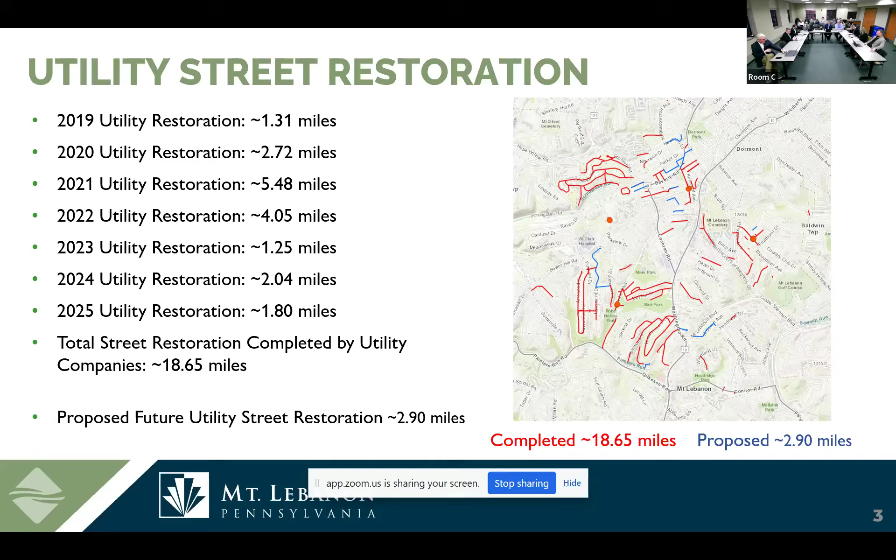Before we get into detail, some overall statistics: the base bid we're recommending for reconstruction has a PCI rating of 53.6, and the alternates are 36.2. That may seem odd, and the same goes for maintenance at 70.4 and 54.5.

One thing to highlight is that when we analyze roads for consideration each year, we don't look at all 88 miles of road, we look at the nearest 3 years and evaluate those roads to see which ones should be considered. We also take into account the Public Works patching list, and the other thing worth mentioning is that the last inspection completed on the roads was back in 2021, so it's 5 years old.

So over time we do notice a deviation from the PCI to actual conditions. It does vary a bit, so I can assure you that once we get the Vialytics data in—we were delayed this year with all the snow and trying to maintain the schedule needed to get the road program out to bid—the street maintenance numbers really aren't 70. They would be lower if we did a new inspection on those streets. That's just the data we have right now.

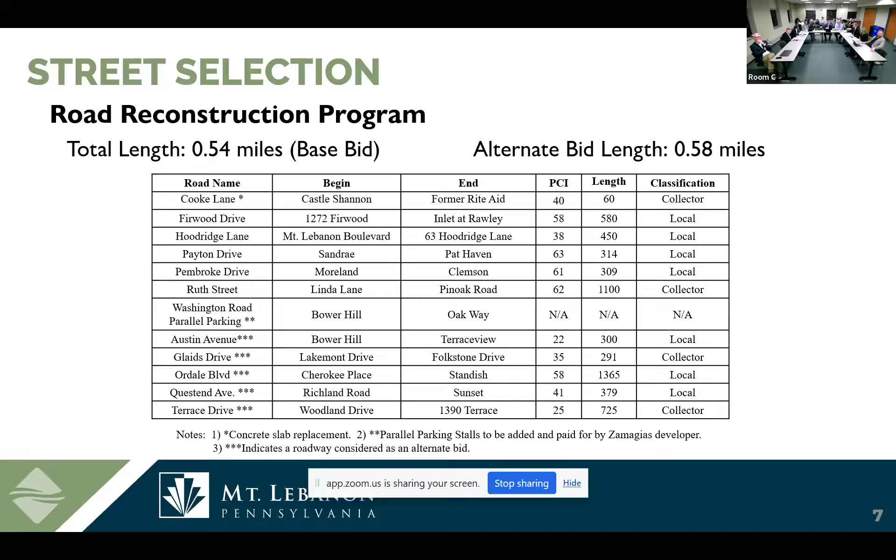That being said, jumping into Cooke Lane. Cooke Lane, we're not planning on a full reconstruction of Cooke Lane. You may or may not know that the municipal line runs right down the middle of Cooke Lane, so half is owned by Mount Lebanon and half is owned by Castle Shannon. The utility company - Columbia Gas - replaced half of it, the Castle Shannon side, unfortunately.

So the whole Castle Shannon side is new going down, but there are a couple, as you come off of Castle Shannon Boulevard, there's a couple slabs that are in real poor condition. Right there is one of them. This is just from a street view, so this is not proposed as a full reconstruction of the road. We're going to replace 2 or 3 slabs on this street. It's best in the reconstruction contract because we have all of those excavation items, concrete items, and things like that. So although it's in the reconstruction contract, we're not proposing a full reconstruction of Cooke Lane. It is going to be multiple slabs.

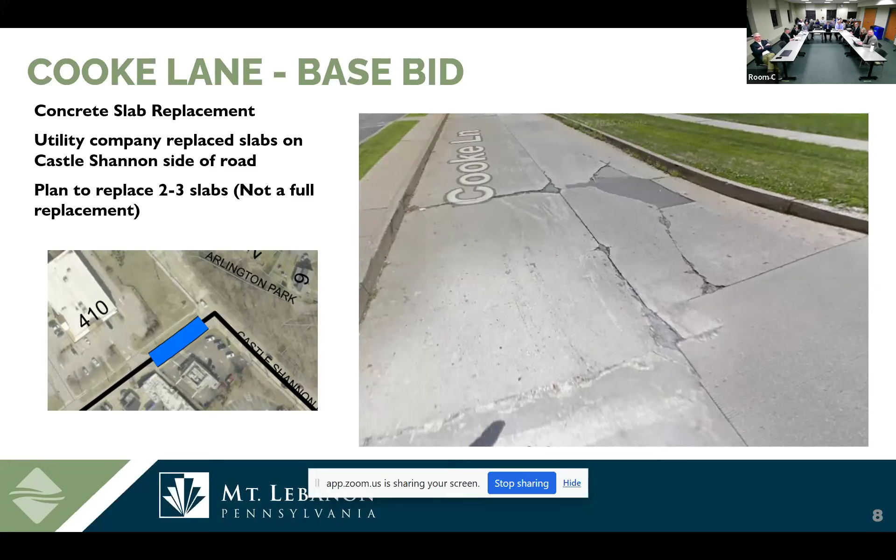And this is one that we're working kind of in unison with what the utility company had completed. We've been patching that for a couple of years just to keep it safe, so there's some settlement, some drainage issues underneath of that concrete, and we're kind of locked into concrete now because the other half was done in concrete by the utilities, which is fine. Concrete is fine as well.

I thought they did asphalt. No, the lower end bottom section is asphalt, from the tracks down to Mount Lebanon Boulevard is asphalt, they overlaid all that. But from like the entrance to the Rite Aid up is all concrete.

So Firwood Drive is the next road. This is one that we've been, as you can see, portions of Firwood have been done in 2017, 2020, and 2024. This is picking up on the next section, heading down toward Rawley.

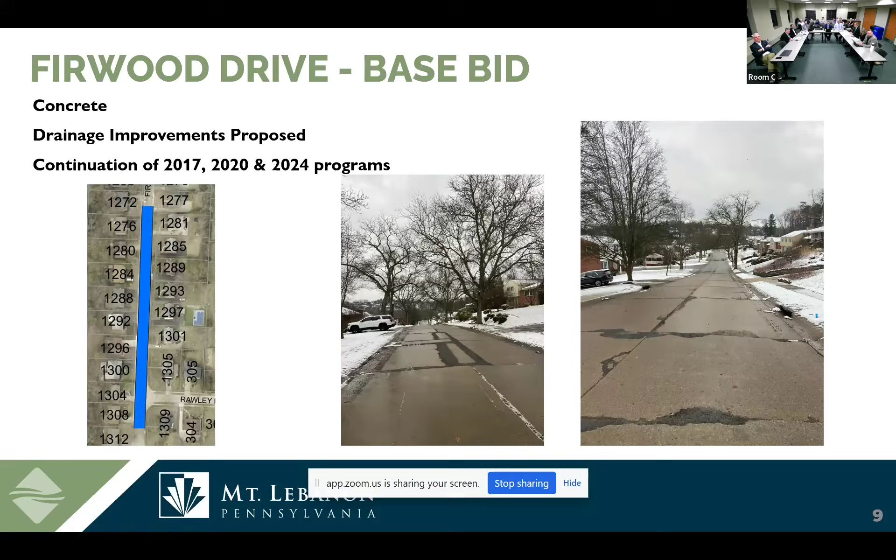Hoodridge Lane is an alley that comes off of Mount Lebanon Boulevard, right as you come off of Washington Road and make the turn onto Mount Lebanon Boulevard. It's on the right-hand side, right before Roycroft. This is actually owned in fee by the municipality, in conjunction with the municipality, the school district, and Allegheny County. So we actually own that parcel you see outlined in blue, shaded in blue. That's actually a parcel.

Is Mount Lebanon Boulevard a county road? No, it's a state road. So we can't do anything to it, correct. Wait, so you're saying Hoodridge Lane, that blue area you might think of as a road, is actually a parcel owned by the municipality, right? Interesting, okay. And there's about 5 houses that back that lane that use it.

And as you can see, it's in pretty poor condition. We are proposing, instead of concrete curbs on this road, bituminous wedge curbs there, just to save a little bit of cost. It's just the asphalt curb.

How will you know you're in Mount Lebanon? All right, well, let me ask though, put that aside. What is our standard, and what do our standard policies say we have to do on public rights of way? This is a parcel. The standard curb is an 18-inch full-depth concrete.

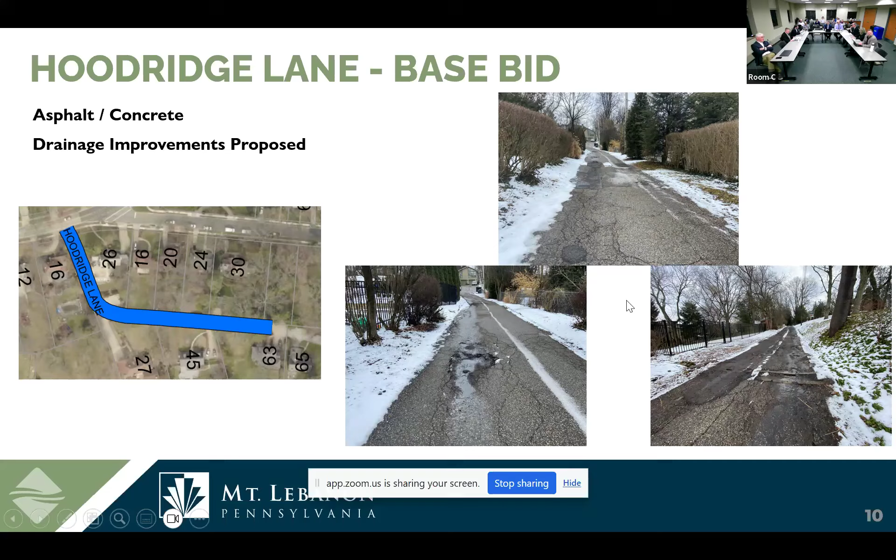Thank you for humoring my questions.

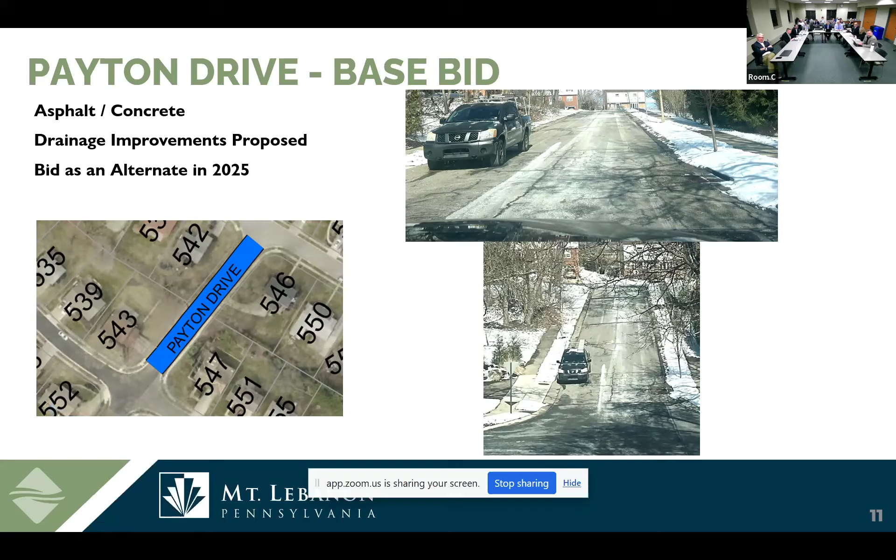Payton Drive, this is a road that we had bid last year as an alternate bid, so we're looking to bring it back onto the program and use it as a base bid this year. Same with Pembroke Drive, which was an alternate last year that we're looking to add as a base bid this year.

Ruth Street was on the program also as an alternate last year. We're looking to do some drainage improvements. Obviously, this is right next to the school, so this would have to be done when school is out of session, similar to when we did Pin Oak last year. We did Pin Oak right around the school last year, and Old Hickory the year before. So this neighborhood is one we've been taking streets year after year. This one's needed a long time.

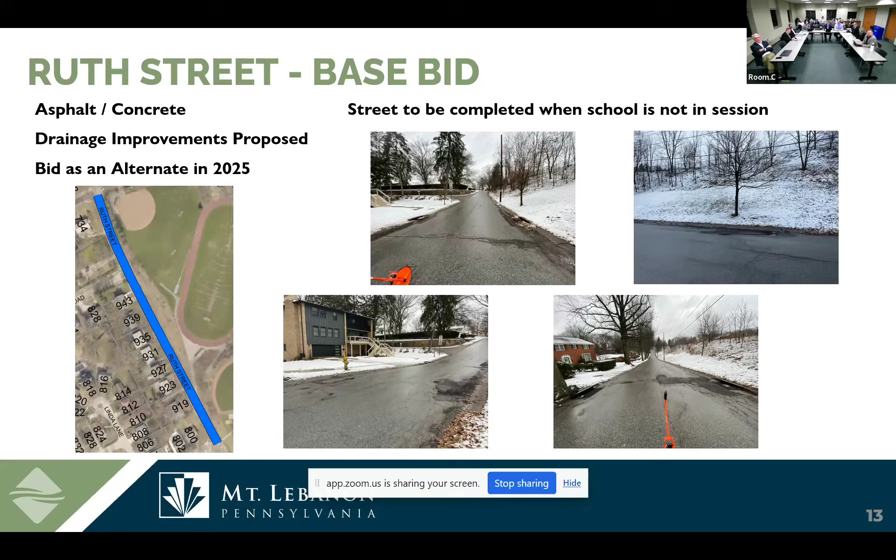Now on the alternate bid side, Austin Avenue is right off of Bower Hill Road, between Bower Hill and Terraceview. We have this as an alternate. We did bid this as an alternate in 2025 as well. Glaids was one that the program initially identified as a new one for this year, and it was also, I think, on your patching list.

Actually, I'm sorry, can we go back to Austin? The mobility board has had residents come forward with concerns about the traffic flow on Austin. If we are resurfacing or reconstructing this, is this a candidate for consideration for how we reinstall it to reduce speeds and traffic flow, essentially circumventing the light at the hospital? I'm not saying you have to answer that now, but don't just go reconstruct this without a discussion.

Given that situation, this may be one that we take bids on, and then pending direction from the mobility board, it may be one that we don't act on this year until we have a recommendation from the mobility board, but I'll take a note of that. If the commission votes yes on it, it can move forward. It's an alternate, so we'll see where we land in terms of it may behoove us to do some additional planning before we actually move forward, especially on a reconstruction.

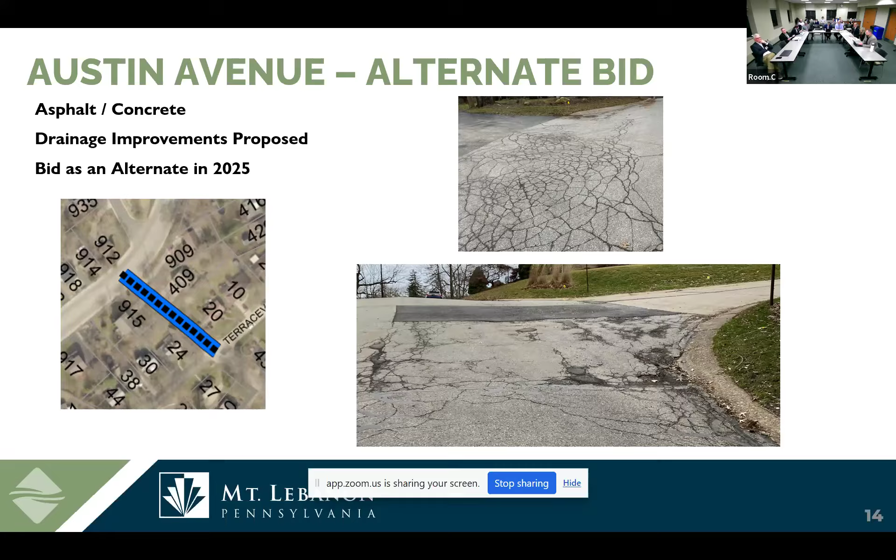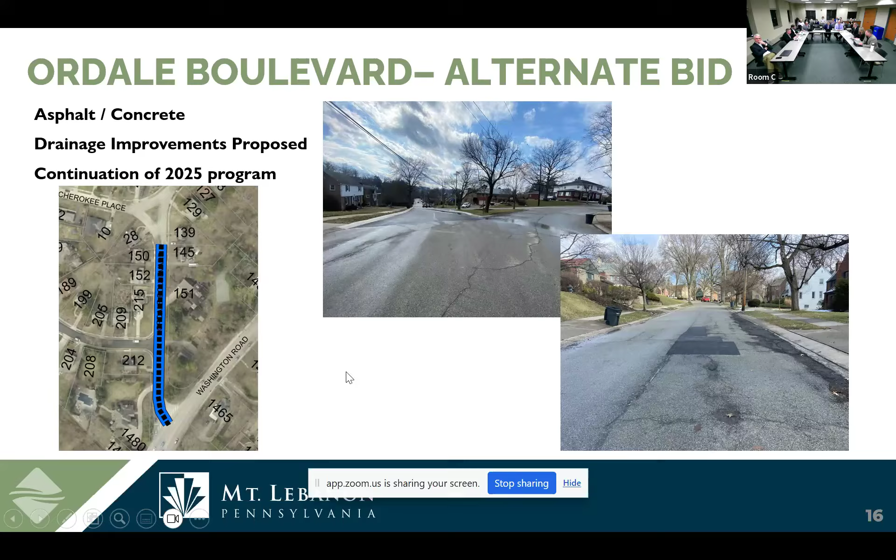Congratulations, you're efficient, you got it done already. Yeah, it's already done, and it's paid for. Congrats.

Questend, this is the section between Richland and Sunset. Alternate.

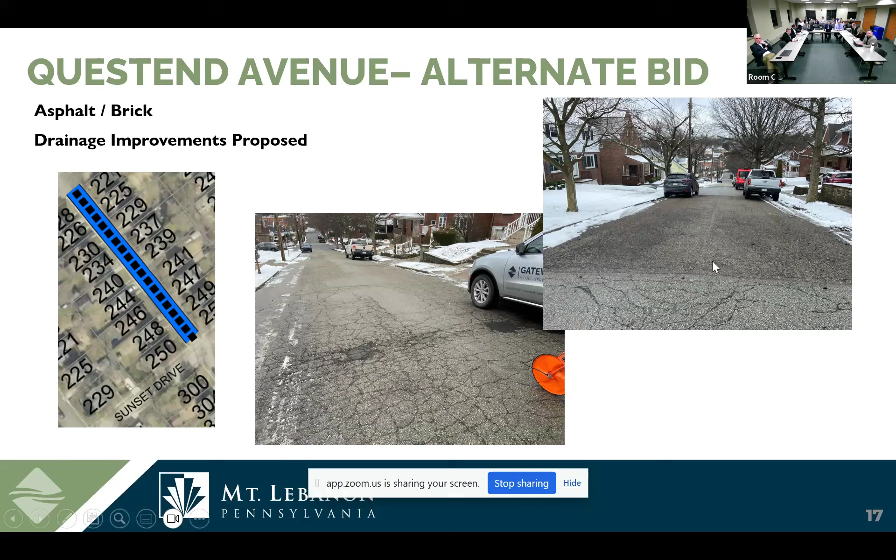Terrace, this is from Woodland working up to house number 1390. The whole section of Terrace is recommended in the future, but it's such a long street that we were thinking of breaking it up into multiple sections.

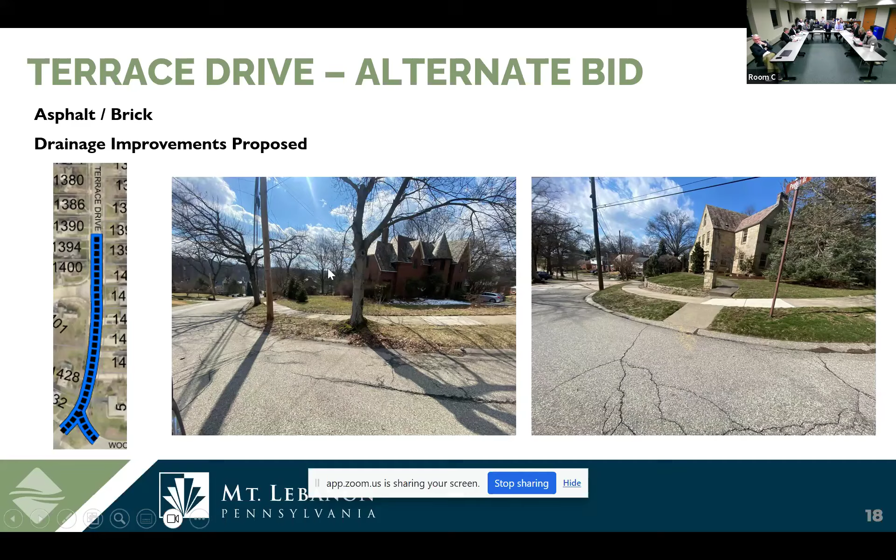So as a summary on the budget side of things, the streets I have as base bids total 1.62 million. Our budget is 2.27 plus the stormwater supplement for any stormwater drainage improvements. There's also another project we'll touch on in a second, but I wanted to highlight the budget. There's another $270,000 from Zamagias for the parking stalls on Washington Road that we're going to be doing as part of the reconstruction, since curb, sidewalk, and paving is all part of that reconstruction number.

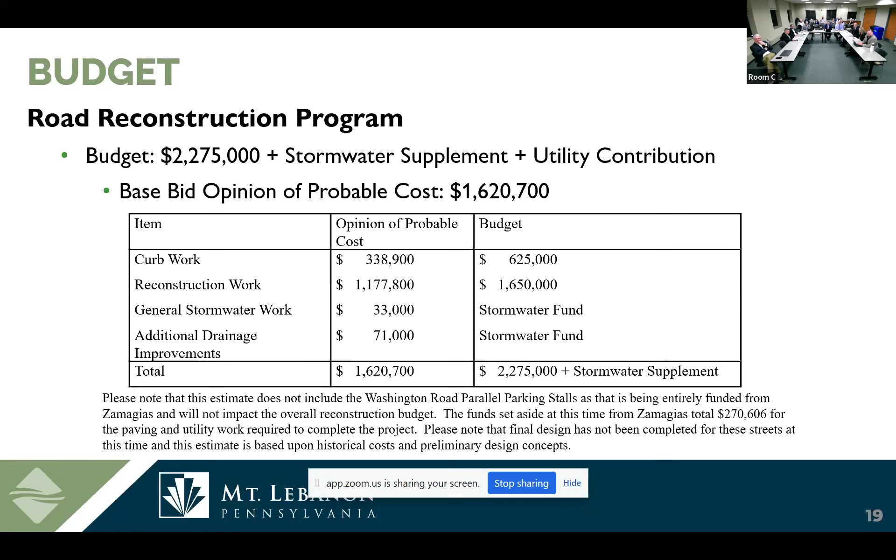So as you can see, we're about $600,000 under budget. So we do have room on the alternate bid side of the streets. We can pick maybe one, two, or three of these alternate bids and get those into the program once we get the numbers in, potentially.

Do we put the ones that have the lowest PSI? Not necessarily, it depends on the numbers that we get. We look at the numbers, and we also try to hold back a little bit on reconstruction for additional base repairs. We try to give some cheaper streets, some middle-of-the-road streets, and more expensive ones on the alternates, so that it's like a puzzle at the end of the day. You're trying to fit it all within the budget, so we have a smattering of streets to work toward that budget.

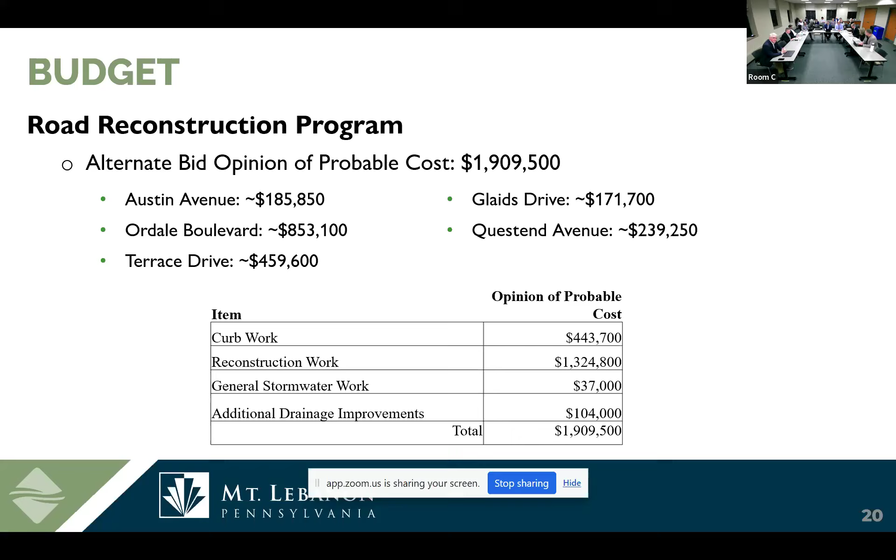As I mentioned, the Washington Road parking will have 18 additional parking stalls and spaces installed between Bower Hill and Oak Way. There's $270,000 budgeted, and that budget does account for utility work with Duquesne Light, because they're moving the power poles from our side to the other side of the road, where poles already exist, so it doesn't impact those stalls.

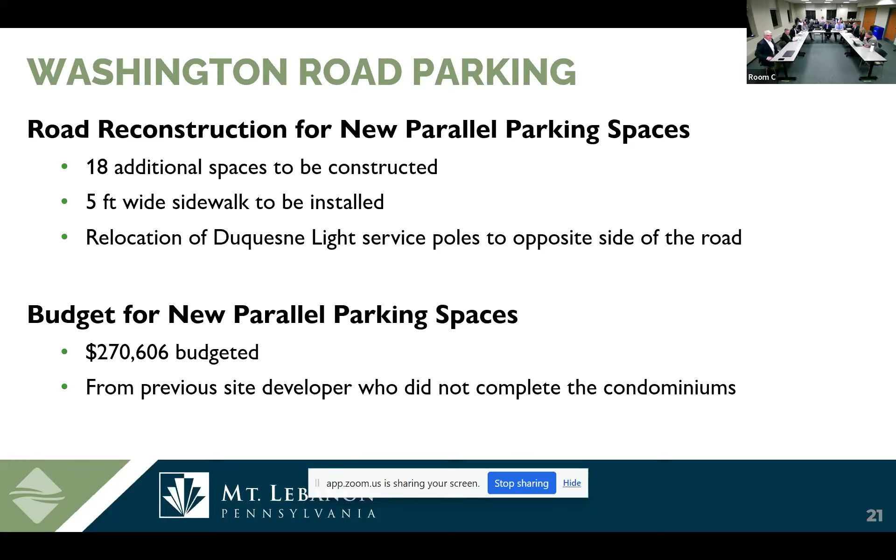I did meet with Duquesne Light back in December. The design has been finalized and it's going through final approval. We should be getting a number within a week or two. At that point, if it's agreeable, we pay that invoice, and then they get it on their schedule to move the poles. If we can move the poles, it really makes the project a lot easier for everybody.

This really fixes up that whole intersection, along with the widening done there to get an extra lane. That's a big improvement that's been promised for a long time. Phil was able to get the money for it. It's right in front of the empty parcel, and it also takes a burden away from that parcel, because they'll have parking there they can take credit for whenever it's developed.

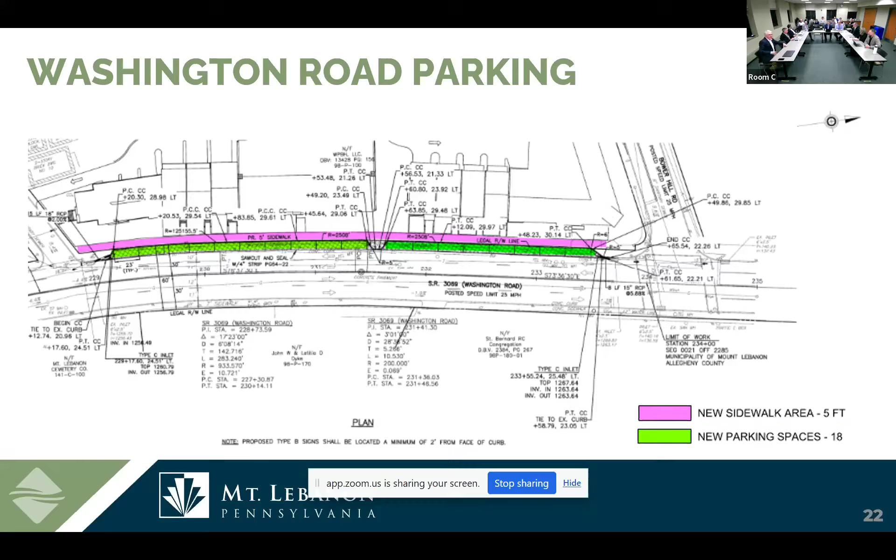Okay, it is not the most inviting entry to the community, quite the opposite.

On the street maintenance, I'll go through these pretty quickly. The streets from Valley Park up are what we're considering on the base bid. Bower Alley down, we're considering on the alternate bid. We have about a mile in the base bid, 3/4 of a mile in the alternate bid.

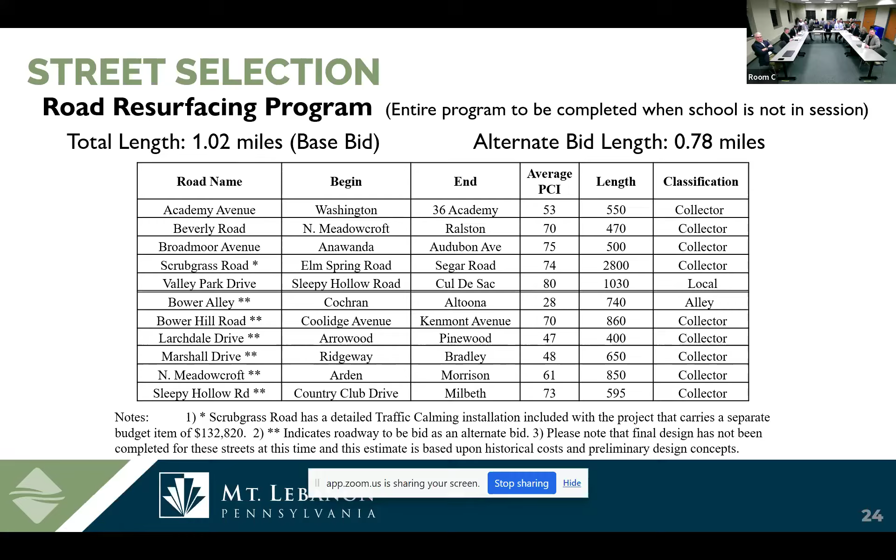As you recall, and we'll touch on here briefly, Scrubgrass Road does have separate funding for the traffic calming associated with it. I'll run through these. We did focus on the busier streets and the ones around school in the base bid, so Academy, just right down the road here.

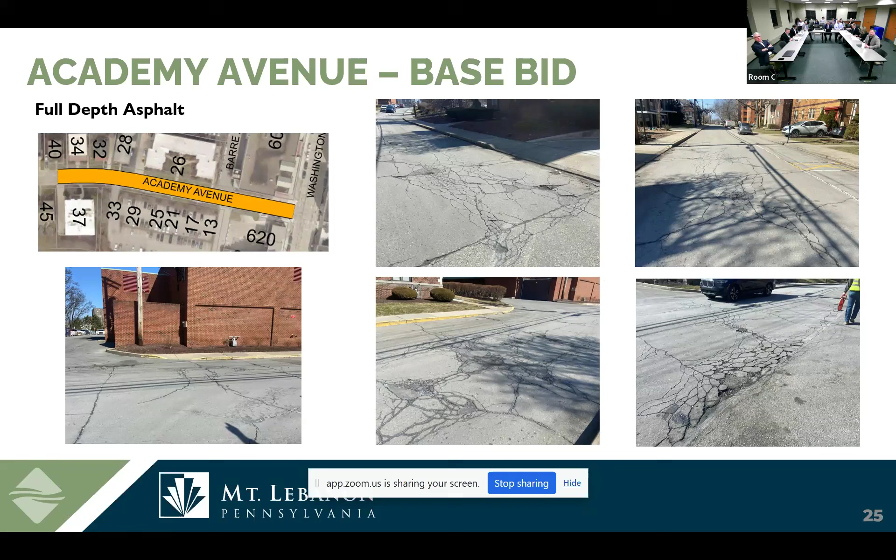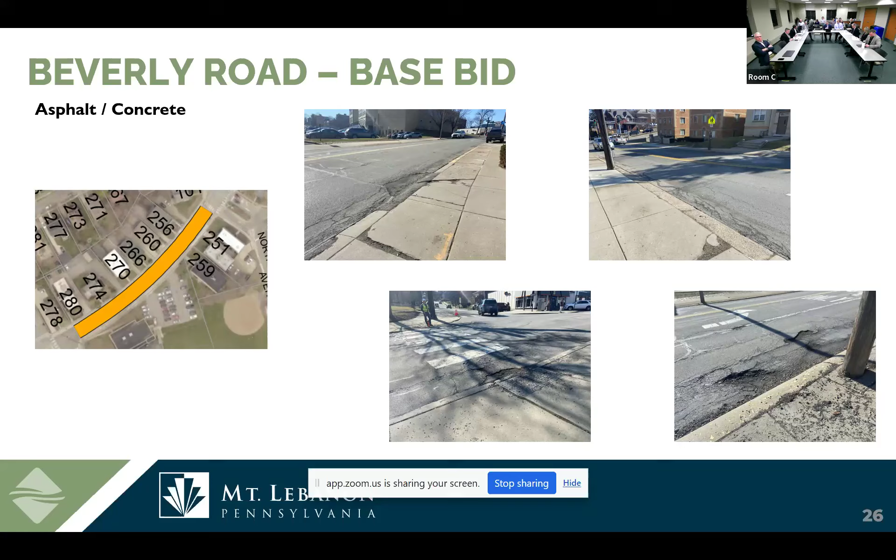Beverly, we are going to be taking advantage of work that the utility companies are doing at the intersection of Beverly and North Meadowcroft currently. So we're going to be building off that, they're coming up Beverly with work and up the first block of North Meadowcroft. So we're going to be tying into both sections of that from Beverly from North Meadowcroft to Ralston. Broadmoor in front of the school.

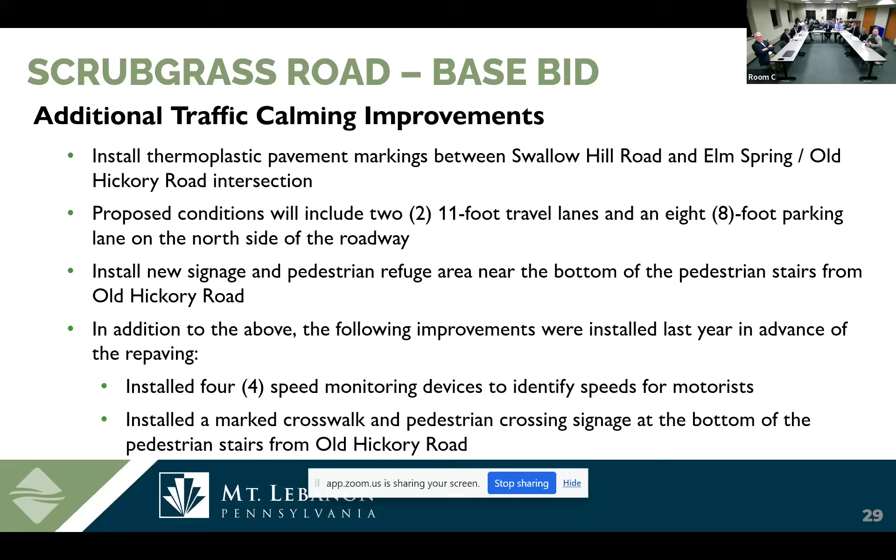Scrubgrass, this is the one that has the traffic calming involved. So essentially we're going to be taking the one lane and making it a parking lane, making the lanes smaller or narrower. And then there's going to be a designated pedestrian area down near the stairs that go up to Old Hickory, which we'll show here.

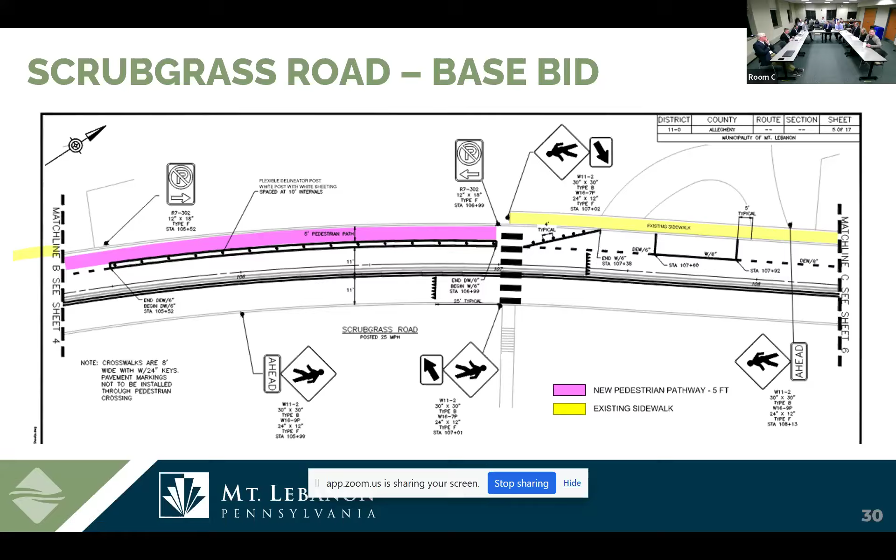The delineators are anchored to the ground, and they stick up like 2 feet or so with reflectors on them, so that kind of quarantines that area off.

The residents, property owners, were really excited about this. This is what they were very supportive of. It'll be good to get done. They were hoping we were going to do it this last year, but the paving was in bad shape, so paving needed to happen. So we need to get going on time.

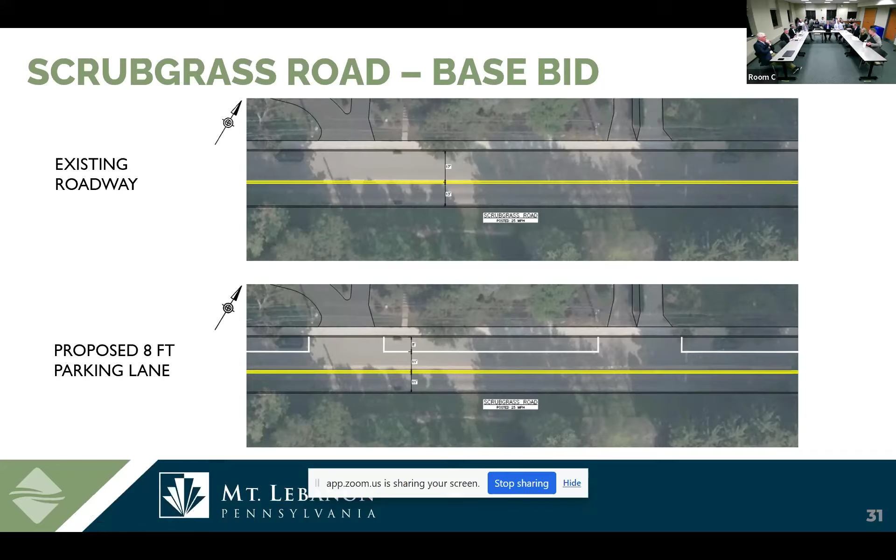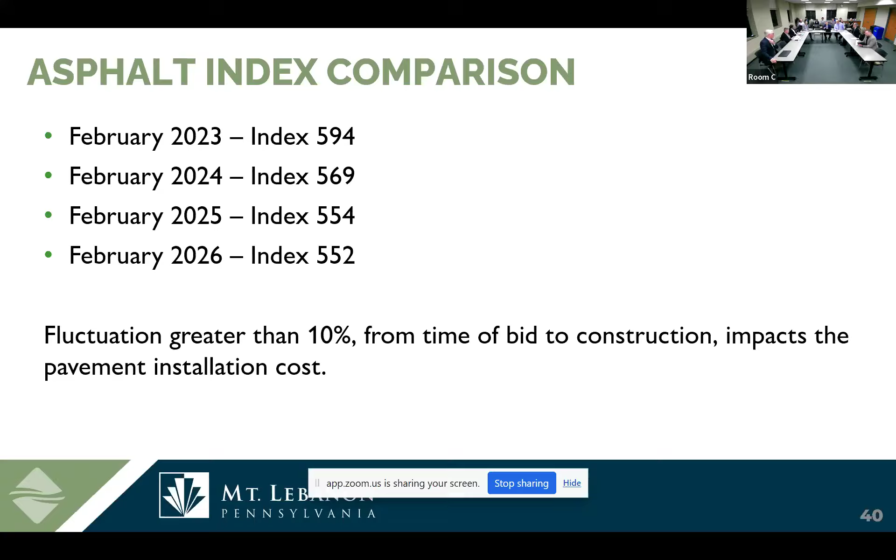Now, it isn't a dollar for dollar because the percent of oil in asphalt is like 5%. So it's a percentage, but just to put that on everyone's radar, we'll keep that in mind as we recommend to the commission.

We'll be back to you with the bids for all of this and make a recommendation. So we're just asking tonight that we put this out to bid and bring it back to you. Perfect, thank you very much, appreciate it, gentlemen.